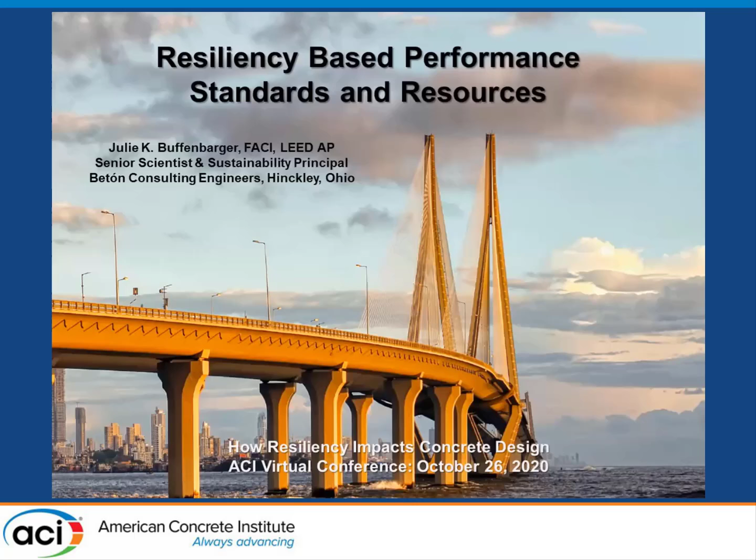Again, we're going to talk a little bit about resiliency-based performance standards and resources. And it amazes me that I started looking at resilience in 2008, and how it's taken almost 10 years for a lot of the government and many entities to catch up.

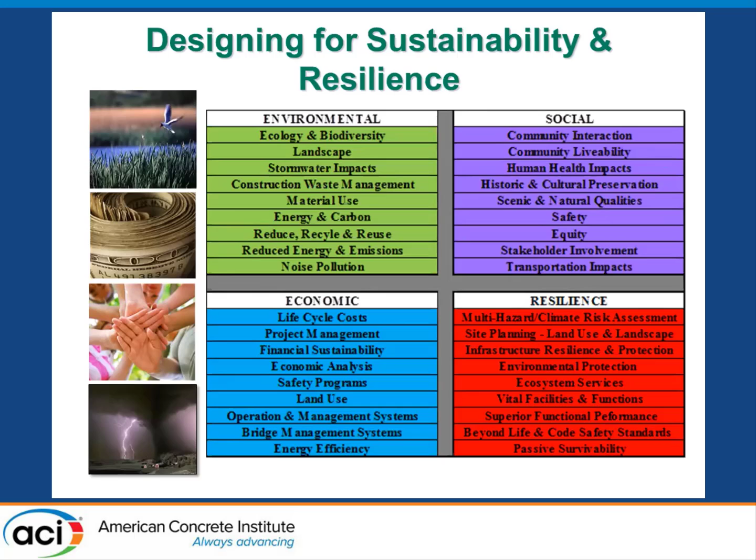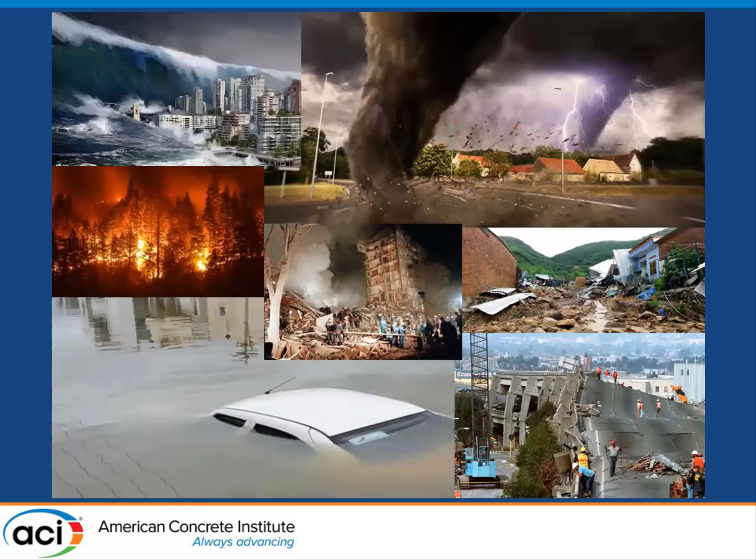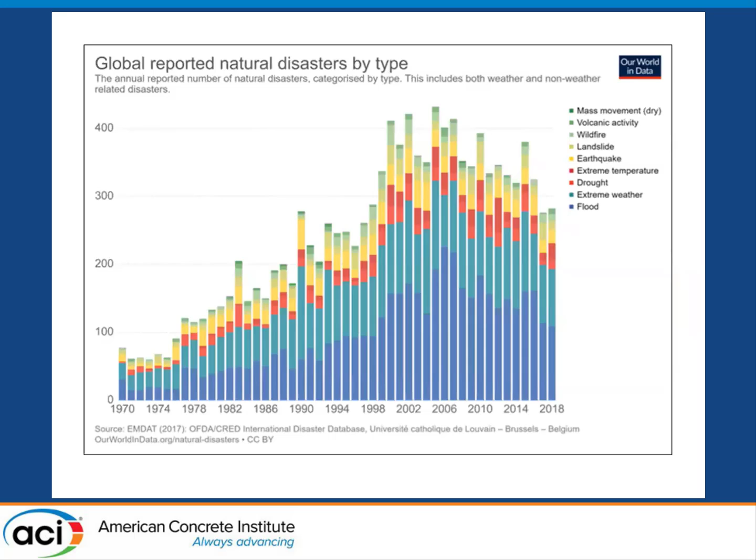When we design, we need to have consideration because, as Claude said, anytime we turn on the TV today, we are looking at what happens across the world with natural disasters. If we look at those disasters reported by type, this is Our World in Data that comes around, we can see that substantially there are earthquakes, but more so than anything, we see flooding, extreme weather events, and so forth across the world.

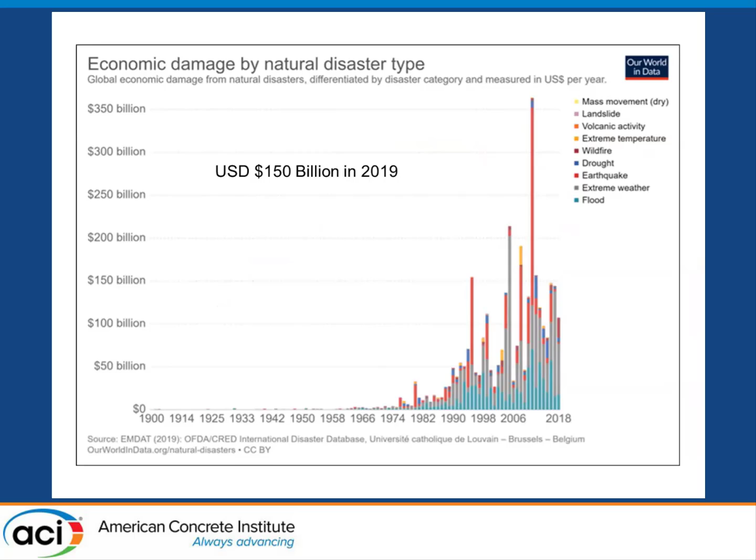And with these disasters are economic implications. In the United States alone, we had an unprecedented amount of economic losses last year due to natural disasters. Worldwide, it equates to about $150 billion in 2019. More so, there are immeasurable impacts that we can really not account for. There's no economic value that we can place on the loss of life or other items such as our loss of social capital, our loss of cultural identity. Certainly these are very important to us in our communities and as individuals.

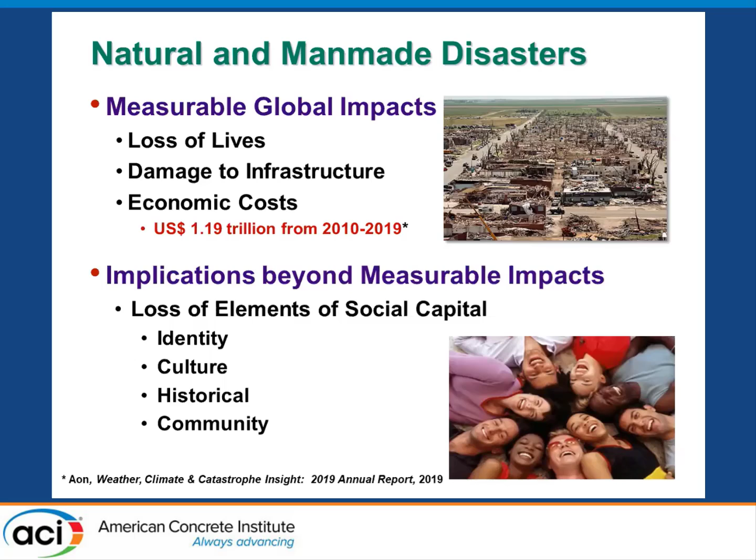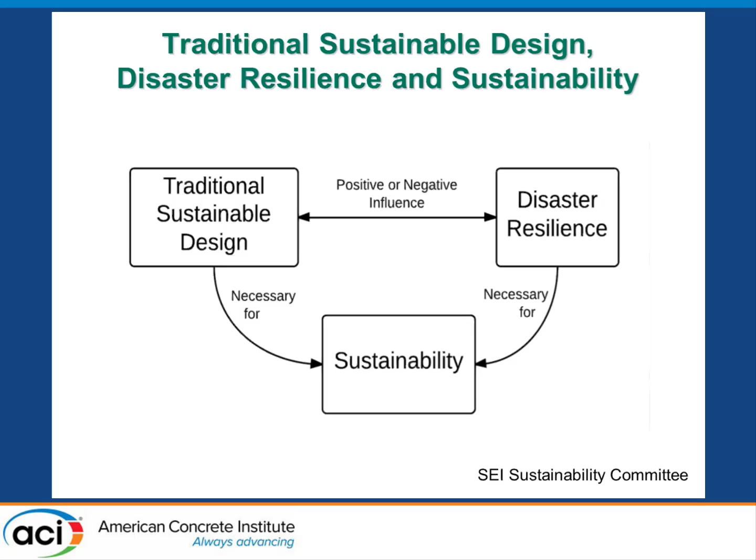Many people say the most sustainable building is the one that lasts or is still standing. Now, a lot of people don't really understand the difference between sustainability and resilience.

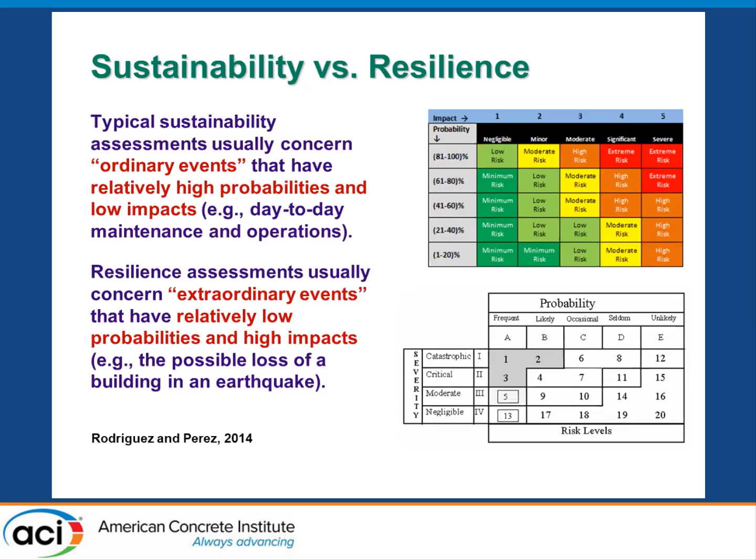I like to really boil it down very succinctly. Sustainability assessment usually concerns ordinary events that have very high probabilities and low impacts, such as your day-to-day operations and maintenance, whereas resilience really deals with assessing those extraordinary events that have relatively low probabilities and high impacts, such as possible loss of a building in an earthquake, major flooding, a tsunami. Those are the types of things that we really think of as extraordinary events.

The problem with resilience is it's really quite complicated. It's kind of like a lot of people say it's the new sustainability. It is, but it is not. I like to look at resilience from really a very high level in many regards, where I'm looking at it from a worldwide level, versus the lens, which is what you make it to be, such as my big eyeball there.

Everyone has a different lens. We may want to look at it at a country level, or at a state or provincial level. We can then drill down into a regional level, to a local level, and then come down to a structure level. It's very multidimensional as well, because we are looking across multiple disciplines, where we will be looking at the functionality of a structure, its failure mechanisms, the mode to recovery, its adaptation. But certainly then we must also consider the multiple stakeholders. We have investors of those buildings, and then who are the beneficiaries of having more resilient design?

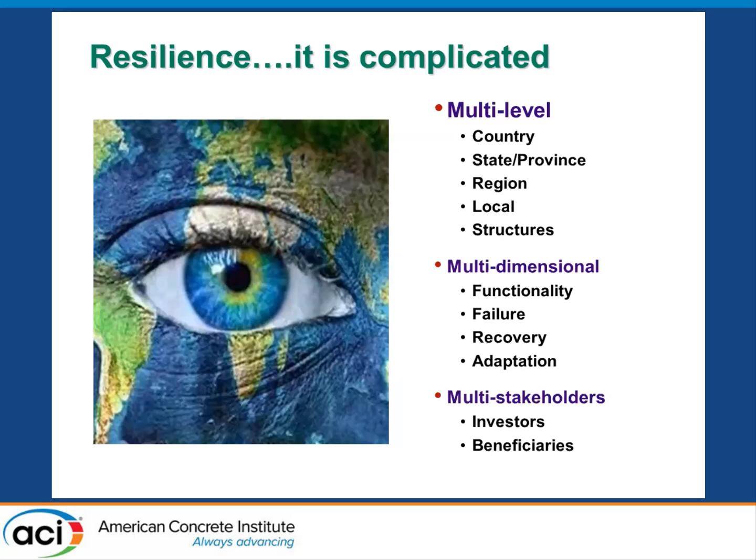Certainly we have a lot of people that look at resilient communities, and this is really where we see the United States and many other countries looking at how do we make more resilient communities. I kind of look at this as one level above our building structures, where we're looking at how do we return our citizens to work more quickly, how do we reopen our businesses, or really what we say today is how do we get our economy rolling again so that people can return to their quality of life.

I also like to look at resilience a little bit differently. Steve Szoke actually coined this term functional resilience, and I really do like it because a structure needs to maintain its integrity, and so its function, its ability to house people and to be inhabitable, needs to be restored.

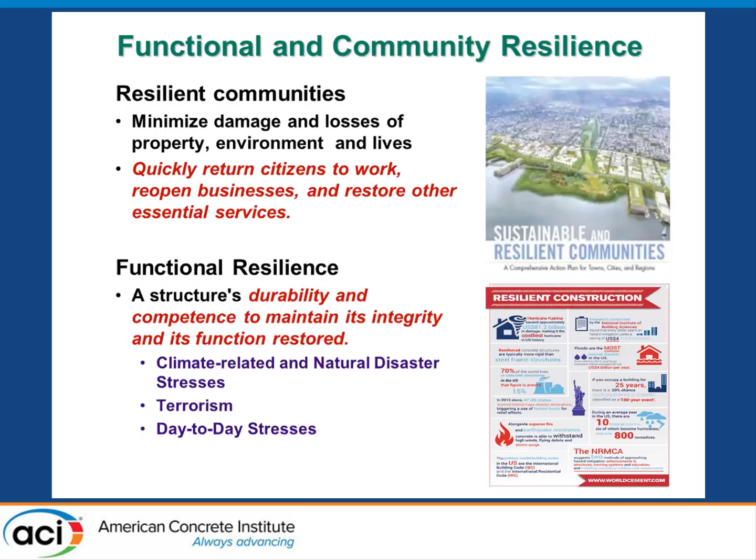Now, we think of disasters as climate-related disasters, but we also have other terrorism-type stresses. We also have day-to-day stresses, and all of these are very dependent on the resilience of the structure itself.

Now, why are community resilience and functional resilience linked? Well, obviously, we need to have structures that have the ability to protect and provide public safety, and we need to be able to recover quickly and efficiently.

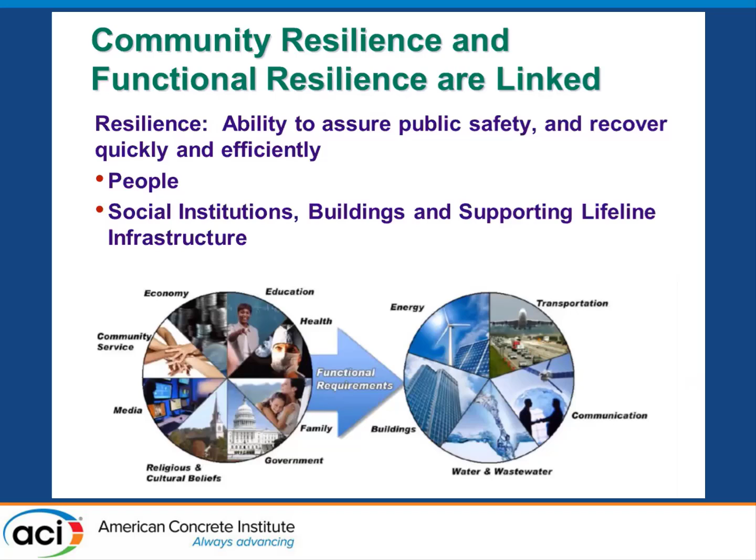So when we look at these, as we said, as the lens: if we have functional requirements for our energy, our transportation, our communication, and these are all segments, these impact our economy, as we've seen right now in the pandemic. They also impact our beliefs, our cultural government, everything is impacted. And so they really go together.

So one of the issues with resilience is that, looking at different levels, some of us may focus on the vulnerability aspects of resilience, which is what is our resistance to the event, where others may be focused more on the human capacity, which is to recover, or bounce back, or to adapt to the changing climate.

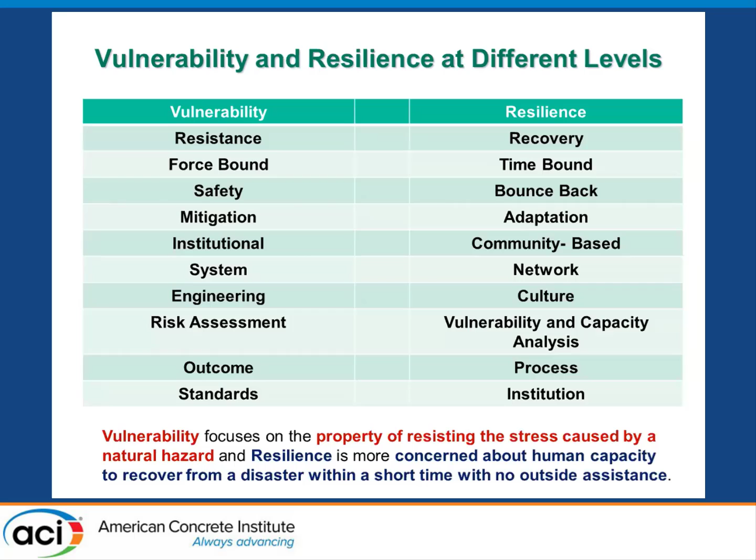So again, as I said, resilience can be quite complicated when we view it not only from a structural level, but when our structures are linked to society, we again have to take into consideration these other lenses.

And so when we look at planning and preparing and absorbing, we really go through risk management exercises. And I am not going to steal Jeremy's thunder because I'm sure he's going to go through this. But when we really look at risk, we're looking at the hazard versus our vulnerability and also the consequences that come with not being as prepared, or the consequences resulting from the hazard over time.

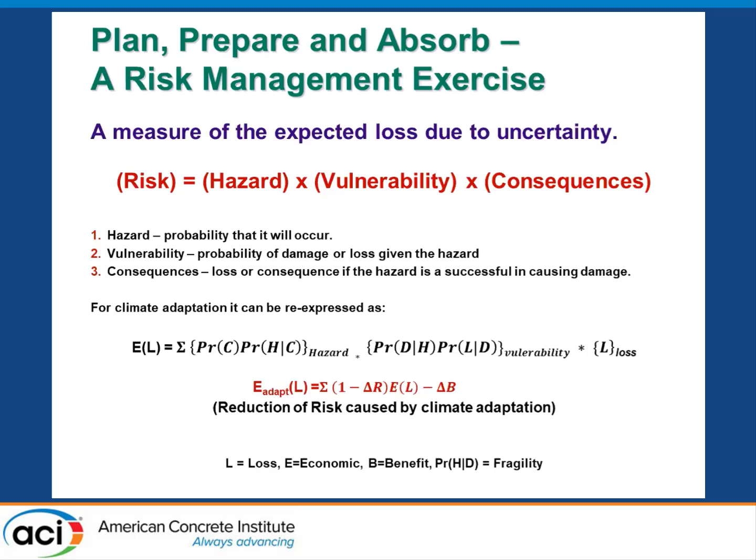And certainly what we try to do is reduce our risk caused by the climate. And certainly this is based on a lot of science, which I will let Jeremy tackle, but typically we look at things like fragility curves and economic benefits and losses.

And really when we look at risk assessment, it's a trade-off. You know, if we have a climate hazard, how are we reducing our vulnerability, or enhancing our resilience, or reducing our exposure, to receive some reduced impact and benefit?

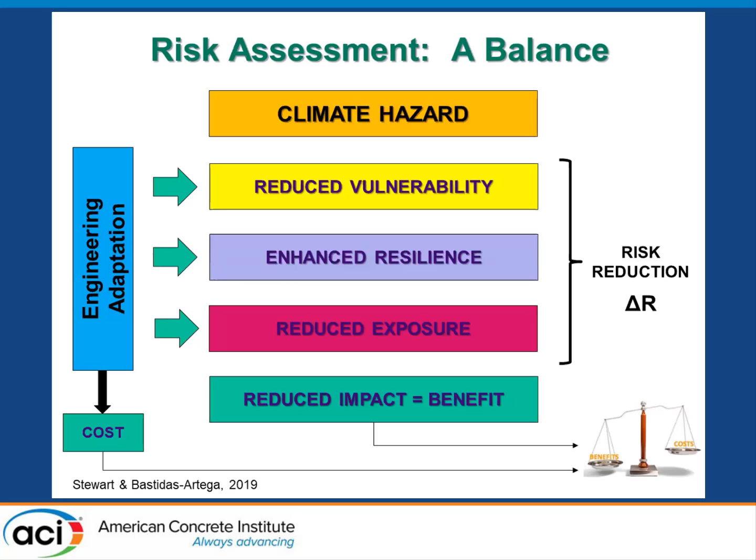And I'll show you this book at the end, but I love this book that was out late last year. And it really succinctly talks about how we balance these things across many different sectors.

But when we talk about risk-based planning and tie it back to buildings, it really is tied back into the codes. Codes are really the principal mechanisms that regulate the design and construction of structures. Most often they are life safety and collapse prevention based.

There is no regulation today as it stands across the US building codes that ensures buildings will be usable after a disaster. Now, with that being said, 318 has started a subcommittee, Subcommittee N, on sustainability, which is also tackling this idea of how do we make our buildings more sustainable and how do we make them more resilient?

It's going to be in code language, but again, we're taking baby steps in the code. Unfortunately, in my opinion, we're lagging where we need to be to provide safety to everyone that is involved in these types of disasters.

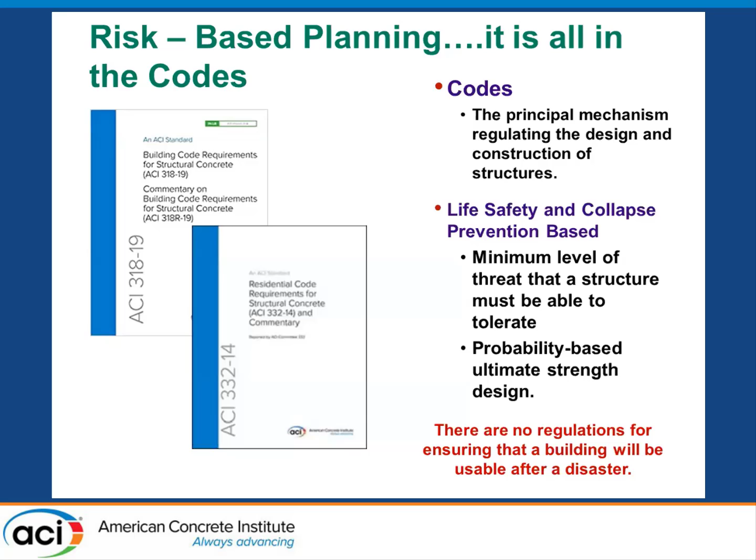And certainly we're seeing changes in codes throughout the world, but they are slow to adoption. And the other complication is the measurement: how do we measure what is resilient and what is not resilient? So, as I said, it's a very complicated issue.

Now, when we talk about resilience, there are many different definitions. When I look at a structure, it's really the structure's ability to withstand some impacts of an event. So we might have a minimum level of functionality after an event, or we may be fully functional after an event. More often, people look at this as the time required to return to normal functioning following an event, a disaster event, a storm event.

People don't like the word event. You might call it an adverse loading, say snow, wind, rain. And really what we have to do is, how do we assess that building after it's gone through this event?

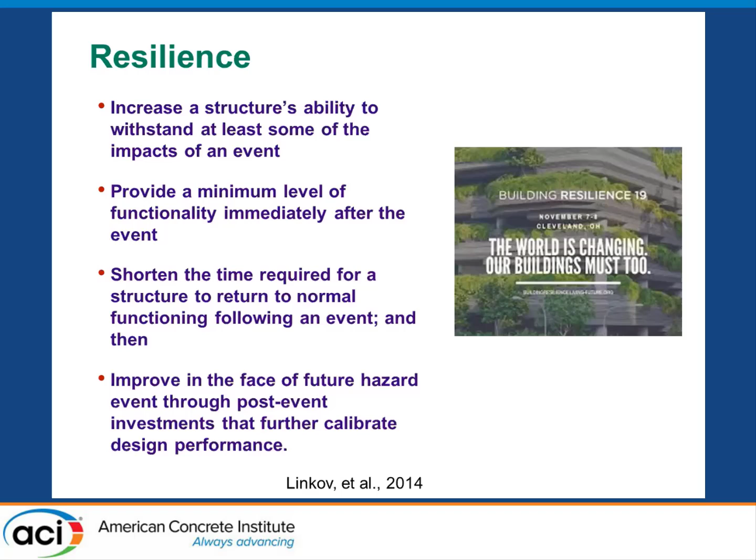And so last year, there was a very interesting group called Building Resilience 19 that was in Cleveland, Ohio, with a lot of interesting speakers talking about these types of issues. And there's not agreement across everywhere.

What I like to look at, when we talk about a building, is this diagram from the National Academy of Sciences, where you have some sort of failure mechanism, whether it's the brittleness of the building, how ductile it is, the graceful failure, and then what kind of recovery event are we looking for?

I'm going to show another graphic that makes a little more sense. When we're talking about this performance criteria, the current focus on resilience is really our plan and preparedness. We're still working on how buildings and how the community absorb this event, and then obviously we have this recovery period. How well we recover will really help us as far as economics and the return to a normalcy that could be better, worse, or equivalent to what we were seeing before.

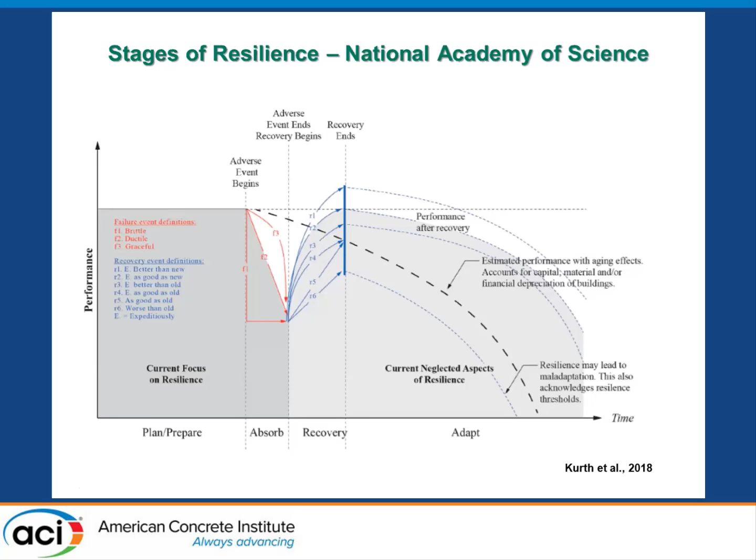We can see the key here, but worse than old, and this slope is going to tell us how fast we're recovering. There is an adaptation portion, and we've often seen that many countries that have gone through these types of events have not really returned to their normal economic boom. If we look at the tsunamis that hit Japan, that region has not yet recovered, nor will they probably recover from that event. Their automotive industry is gone, those jobs have been lost, and those people are still rebuilding their lives, such as we see in Katrina in the US.

Now I'm going to go through a brief review of some of the industry standards and resources that are available to us.

This is a slide I really like, from a workshop I attended in Washington, DC, done by FEMA and also the National Institute of Building Sciences. If we take that same graph but make it a lot less complicated, how robust we are in our buildings, or our capacity, will really determine how prepared we're going to be and how fast our return to operation will be.

So if we have an asset that has very low resilience, we're going to follow this red line where we're really not going to recover. We're still going to have issues returning to normalcy. We're just not going to get there because we can't anticipate, say, the additional snow load on a building or the additional flooding that's happening in your area.

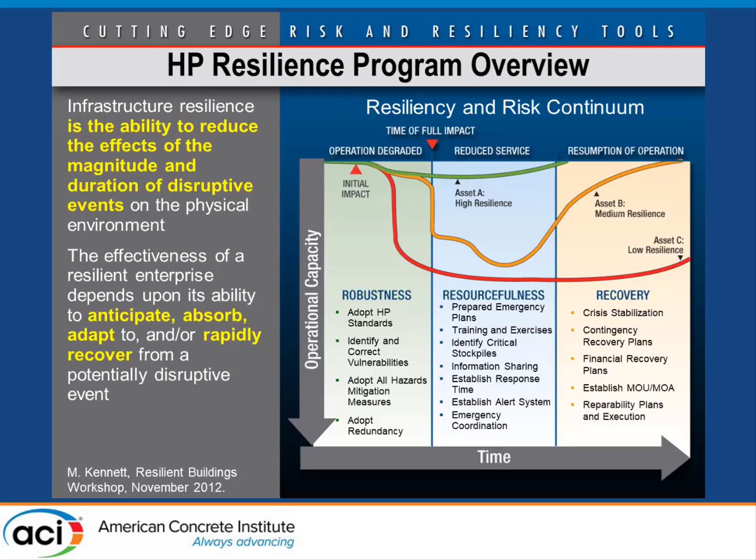We might have a medium asset building, which may resume operation, but it's going to take substantial time to get back to that normalcy, and again we might have to have some contingency recovery plans. Ideally, we would like to have the ability to return very, very quickly with very little reduction in service. That is really a truly resilient structure, a resilient community, and really a resilient country in many regards.

So why is this investment in resilience so important to us? Many of us might look at this as exceeding the minimum design requirements, because when we look at resilience under a similar lens to sustainability, we realize there are some societal benefits. Many people that go through these disasters suffer PTSD, there are injuries, long-term job losses, deaths, and certainly there are environmental benefits by enhancing construction materials.

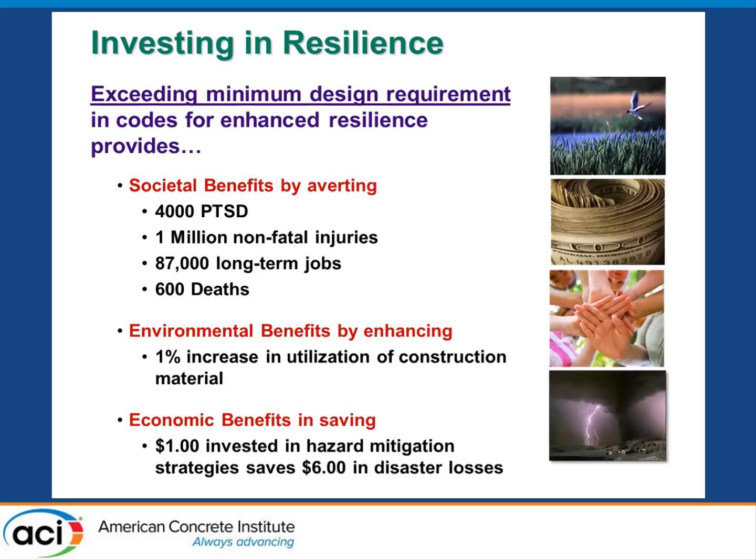FEMA did a study: what used to be for every $1 invested in hazard mitigation strategies, you would save $4. They reevaluated that about 2 years ago and now have found that for every dollar we invest up front—in resilient construction, in fortification of our existing structures—we can save $6 in disaster losses. So there is a very large economic implication in having stronger building codes.

Many of us have seen that there's been very little legislation over the course of the last, I would say, 20 years. I'm just going to go over a little bit of the legislation that has been spearheaded by the concrete industry. This was spearheaded by NRMCA, in 2013.

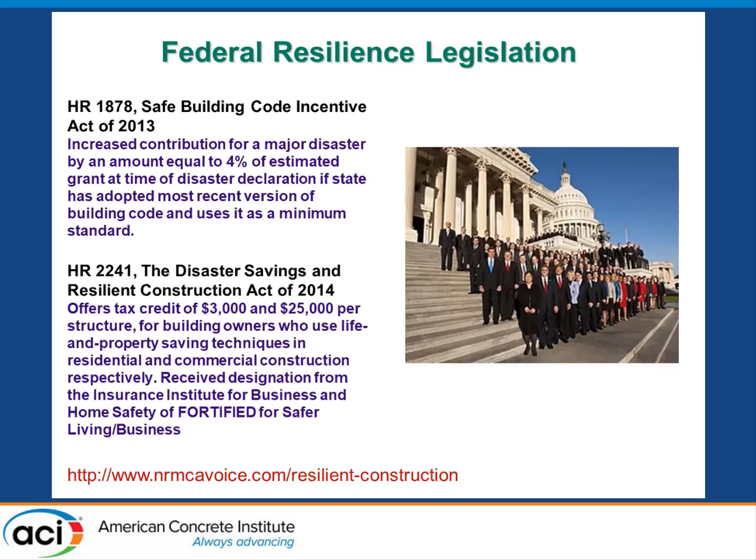Those things spearheaded were the Safe Building Code Incentive Act of 2013 and the Disaster Savings and Resilient Construction Act of 2014. These offered tax credits to those people that would use life and property saving techniques in construction, using some ideas coming from the Institute for Business and Home Safety, using their Fortified for Safer Living and Business. We'll go through some of these systems in the future.

There was also some amendment for the Water Resources Reform and Development Act, again to help resist hazards due to a major disaster. This was done by the Army Corps of Engineers, along with the National Academy of Sciences, to consider the reduction in long-term costs and vulnerability of our infrastructure. As many of you know, much of our infrastructure is quite dated, in need of rehabilitation and fortification.

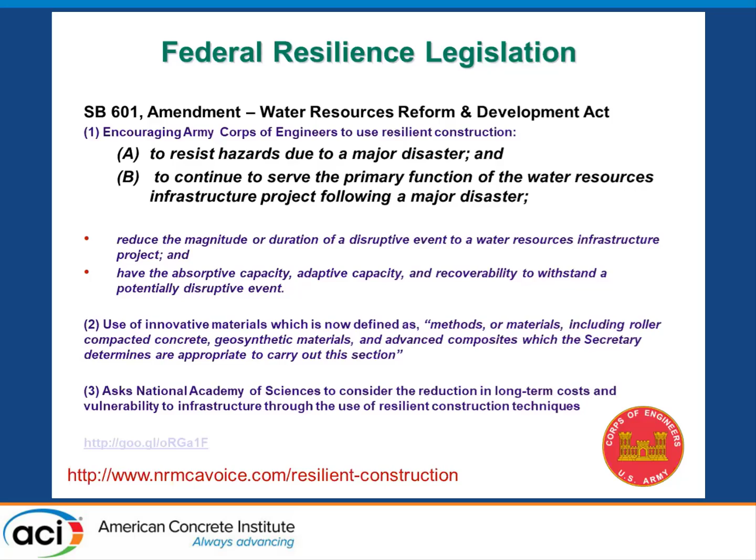When I start looking through the literature—and this was a good exercise for me, because while I keep up with it, it's been a while since I reviewed where we've been and where we're going—really in 2017 we started to see an impetus for design professionals to consider resilience and climate-related risks. This was done by the U.S. General Services Administration in their Publication 100, which asked professionals to exercise judgment regarding resilience and climate-related risks as an evolving professional standard of care.

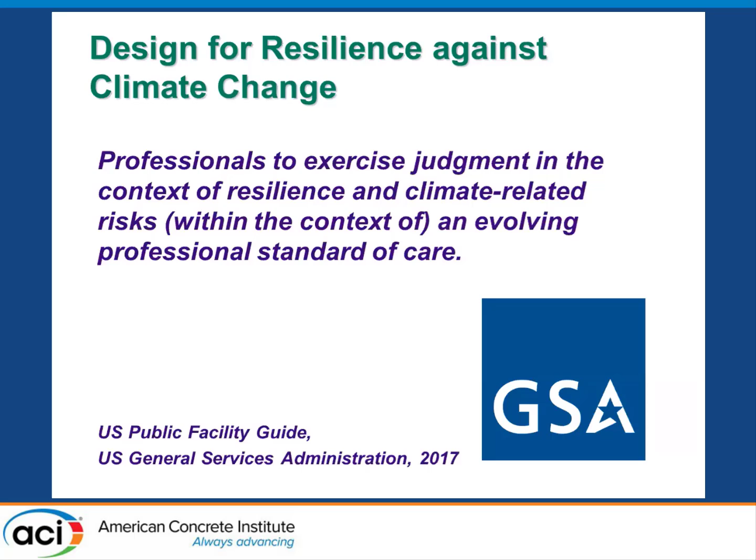So when we start using more of this code-type language where we say 'the professional standard of care,' now we're asking them to consider including resilience.

Some of the major influences I've seen in the last 10 years have certainly been the onset of disasters and how the insurance industry has responded. As I said previously, we're seeing multiple stakeholders that will influence the building code and our ability to move forward with design policy.

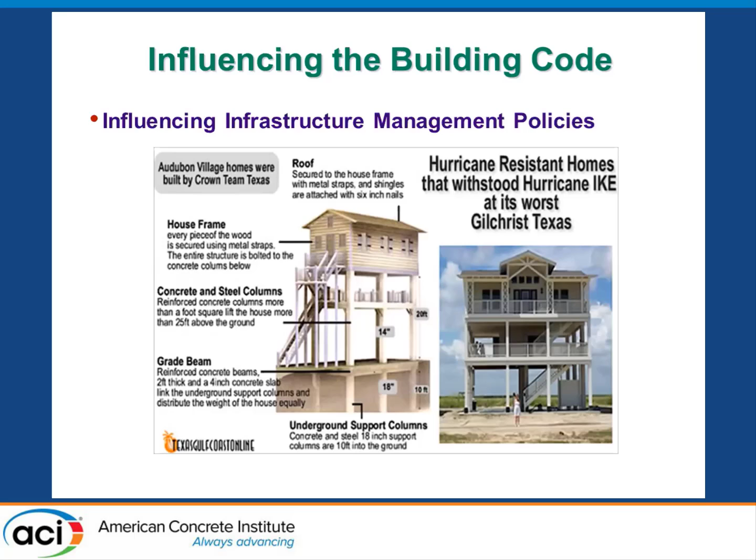When we saw hurricanes and the rebuilding of structures on the coastline, we first saw them allowed to be built back the same. But they go through another disaster and another insurance claim. Now we're seeing them actually required to build at a higher height, out of concrete, and secured with metal straps. These are changes influencing the building code for a safer environment for people.

Recently I also looked at the resilient adaptation work from the Center for Sustainable Building Research at the University of Minnesota. I really like their resilient goals, looking at what happens when we have no power—can we maintain someone in their home at that time with a habitable temperature?

Case in point, we've designed buildings over the last several years without operable windows. When we go through a heat wave with no air conditioning, that building may no longer be habitable because it's simply too warm to stay in.

Then we look at closed water systems and shelter. These are all terms we call passive survivability, where you're able to shelter in place. Our building codes allow us to stay in the structure and maybe evacuate safely, but they're not built for us to stay in the structure in a way that we could survive for a week or ten days. Unless it's built that way, you're probably going to have to evacuate the building.

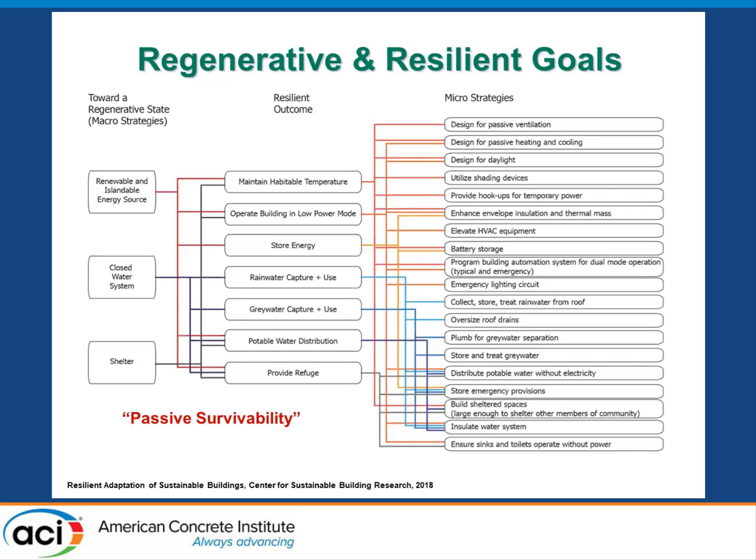A lot of this, as we see, LEED has always played a very large part in some of the codes and how they've changed. They started looking at green building and climate resilience in 2011, and since then it's really been more about disaster recovery.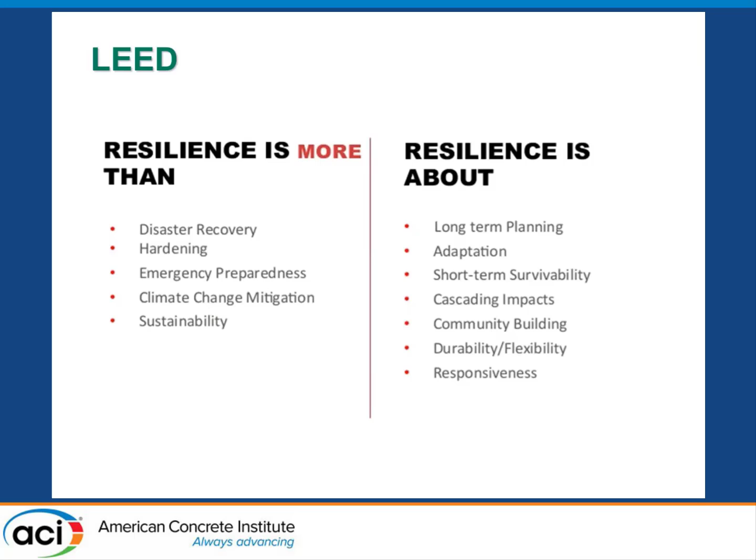Now they've moved more toward long-term planning of a structure—am I looking at short-term survivability, durability, flexibility, and responsiveness? So I do like seeing that LEED has grown and is looking more toward the future in planning.

They've actually included some pilot credits most recently—pilot credit 98, 99, and 100. We can see there was assessment for planning for resilience, design for enhanced resilience, and passive survivability. They would ask you to assess the hazards, which was a prerequisite to receive the credit.

Many of us may or may not be familiar with the LEED rating system, but it has often driven a lot of code requirements and carbon credits, and many of the governmental regulations out there today on the West Coast.

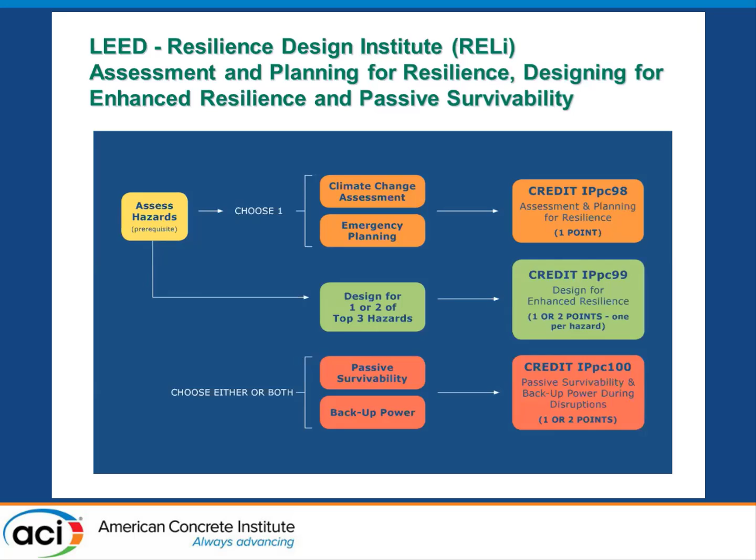Some of the other things I've seen in the literature, coming over time, is that FEMA, the Federal Emergency Management Agency, has looked at how we provide for community resilience. Many of those ideas have been based around community planning, and they've offered guides as to how we appropriately look at hazards.

When we look at resilience, we look locally. You cannot plan for snow in California the way you plan for snow and heavy loads in Minnesota. So we're going to have different weather events in our regional areas.

A lot of the modeling that goes into the codes, we really can't fully account for because we're looking at historical data versus what is happening today.

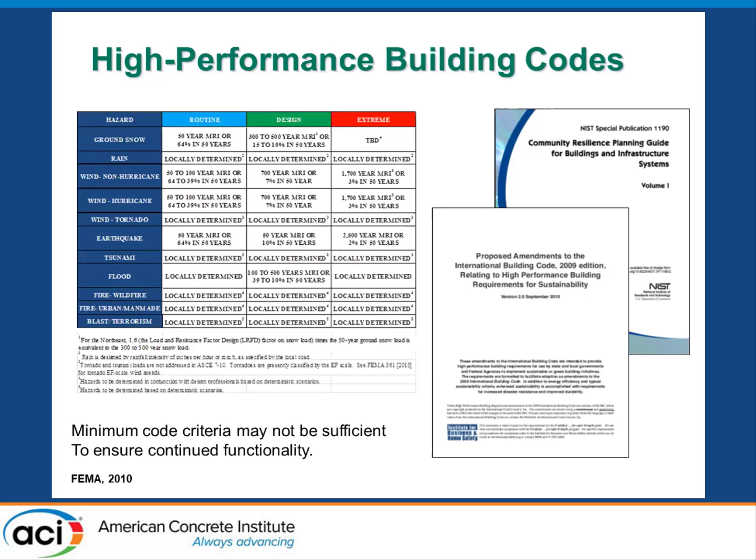One of the other areas I like to look at is the proposed amendments for high performance buildings. I won't take this away from Steve Szoke, who worked very hard on amendments that would take the International Building Code to a higher performance level. Again, we've never been able to design for what we're typically seeing today in extreme events, only historical design loadings.

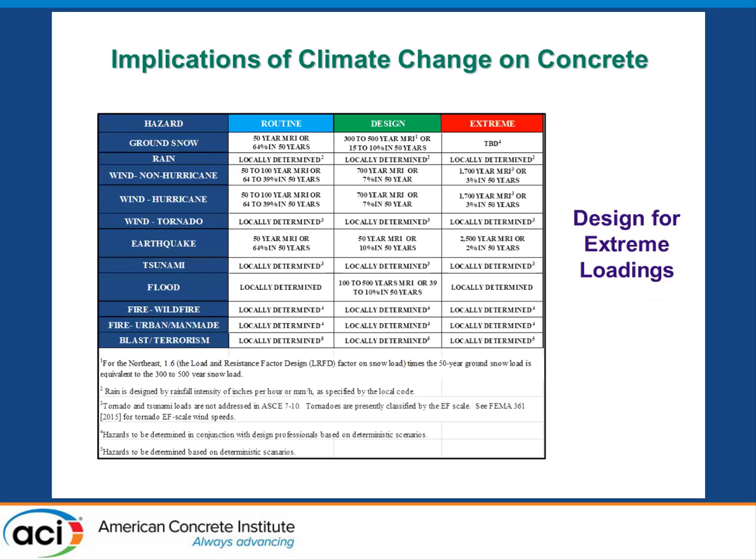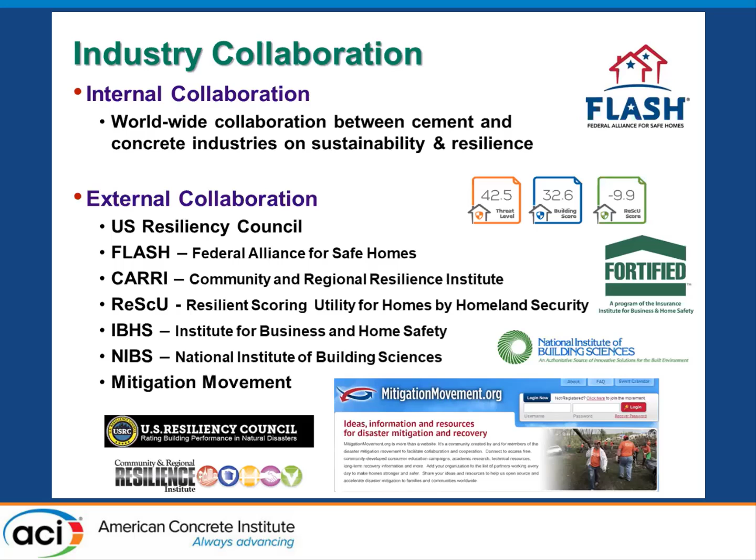When we look at industry collaboration, we've seen a lot of collaboration in the cement and concrete industries worldwide from both a sustainability and resilience lens. Some external collaboration has been with agencies such as the U.S. Resiliency Council, Federal Alliance for Safe Homes, the Community and Regional Resilience Institute, the Institute for Business and Home Safety, National Institute of Building Sciences, and the Mitigation Movement.

I'll go through a couple of these. One is the Insurance Institute for Business and Home Safety. They have standards for safer living, both on a commercial level for safer businesses and for safer living residentially. You can see some of their table of contents. What I like about this standard is that it uses very simple tasks to increase resilience to a hazard, like adding straps into roofing assemblies, which are low cost and economical.

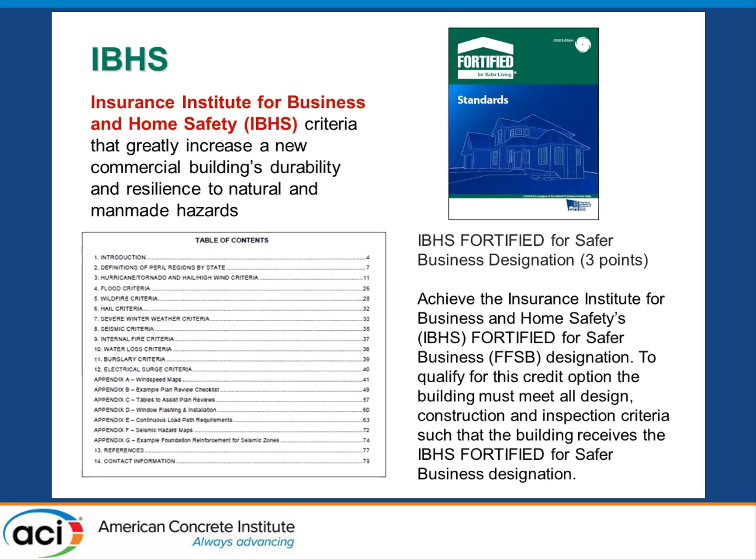There are other existing models for enhanced resilience, including the U.S. Resiliency Council and NIBS. The U.S. Resiliency Council is looking primarily at earthquakes and at a performance rating system. They adopted some ASCE-based methodology and look at the performance of a building under consideration, looking at a design basis event through the ASCE 7 provisions.

What they're really looking at is the repair cost reported as a function of building replacement cost when subject to ground shaking with a 10% probability of being exceeded in 50 years. So they're given some measurement of 10% within a certain life cycle. We'd like life cycles to be much longer, but hazards can shorten that period in which a building is functional.

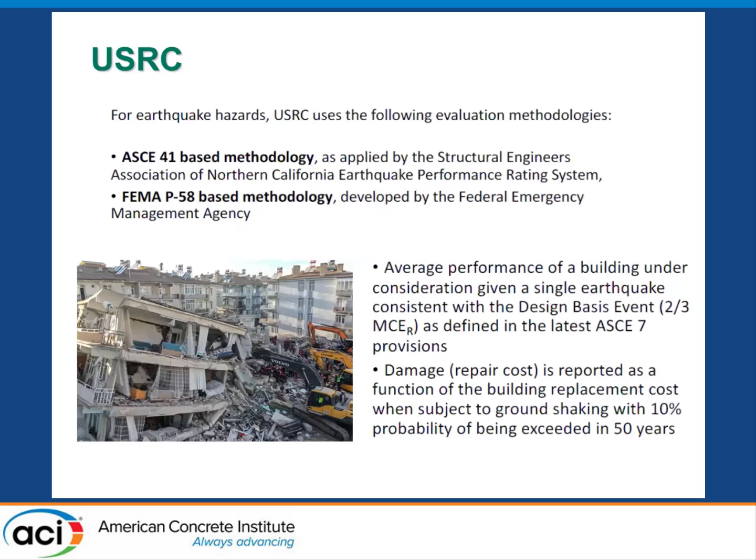Ideally, if we look at structures, we may have to add redundancy, which adds to the cost, but we have to weigh that against how we're going to resist hazards in many ways.

NIBS has a resilience-based design provision, looking at a resilience goal by providing design criteria based on functional recovery time. I'd be remiss if I didn't thank Emily Lorenz for sharing some of these slides with me. I saw them presented succinctly yesterday, and she kindly let me borrow some of them today.

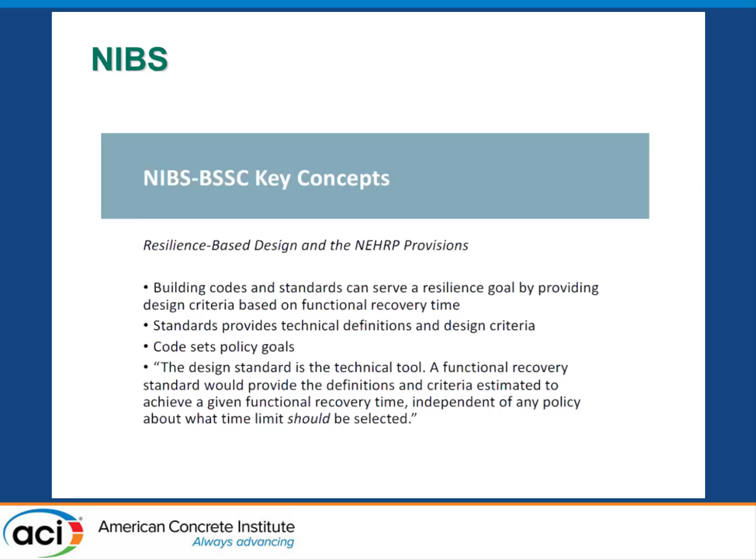Their design standard is a technical tool looking at the functional recovery standard, what time limit should be selected, and what strategies and provisions should be set in specific criteria. The concept, in many regards, is a supplemental or perhaps primary basis for earthquake design of buildings.

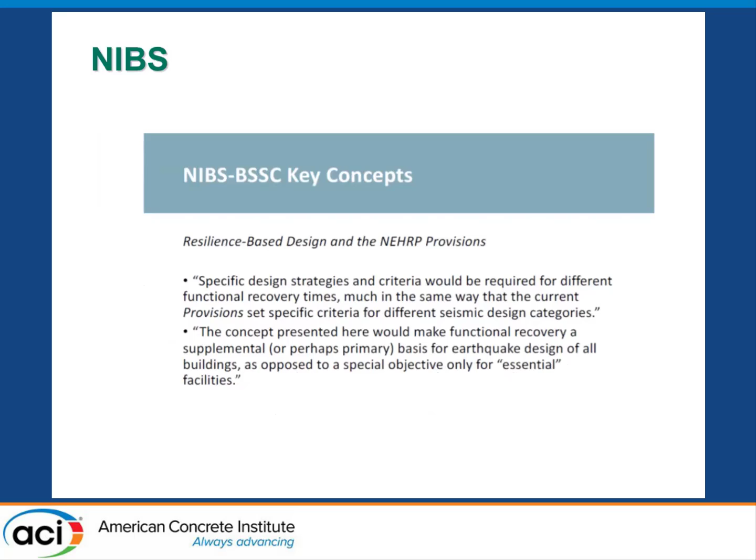But we have to look across the spectrum of natural disasters and what would take place. Other things to consider: how recovery time is defined—hours to months? The rate at which we recover will really dictate our level of success in returning to normalcy, so how we design is important to how fast we can recover from a disaster.

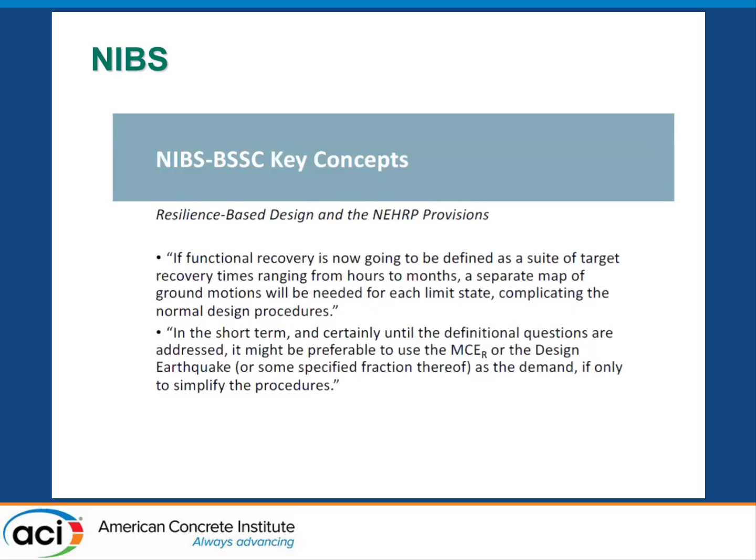We could build buildings today and say we don't really need them to have a high level of resilience; we can deal with a low level of resilience. I like this because it looks at buildings as having their own identity—how long do we want a church to survive?

How long do we need a hospital to survive? How resilient does each building need to be? I also have to say, what kind of structures are there? If we have a wastewater treatment plant or a bridge that allows egress during a storm event, that needs an exceptional or very high level of resiliency. So part of the difficulty in our lens in viewing resilience is how do we look at the metrics, and how is it viewed?

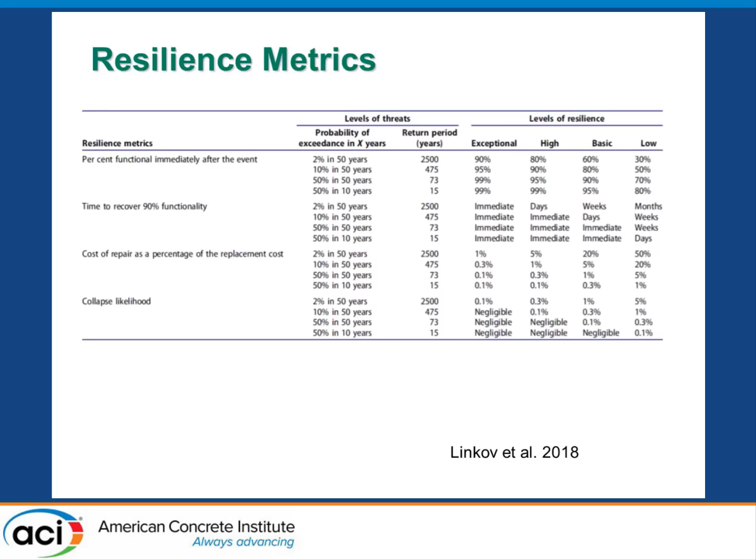There's also the problem that we haven't always taken the land use into consideration. In some cases, very sustainable buildings were built along seasides, but they were struck down during very large storm events. Case in point: if you remove some of your environmental barriers to hazards such as sea level rise or surge, we can build as sustainable or as resilient as we want, but we may still not have a building standing in the end.

The other part of this, as I said, we have to look through different lenses. There's the economic part—there's really a lack of economic incentives today for the code to go in this direction. Many of us would like to get our insurance agencies involved, and they're willing to look at it, but not fully. So again, there are obstacles.

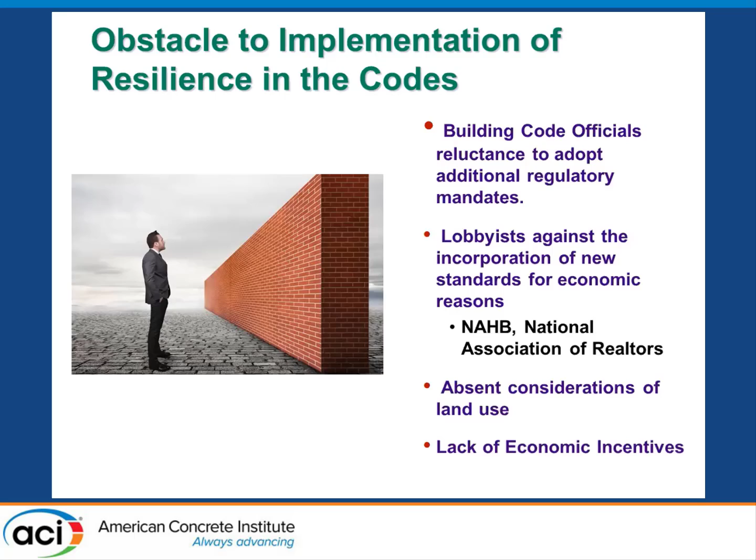In closing, I hope I've given you a broad overview of what is going on in our industry. I like to look at it through my life cycle lens: what we build and how we build will all have some environmental factor. And as I say, resilience will have these social indicators. If we use the right tools and the right design, we can have very long-lived structures, and these all have implications on social indicators.

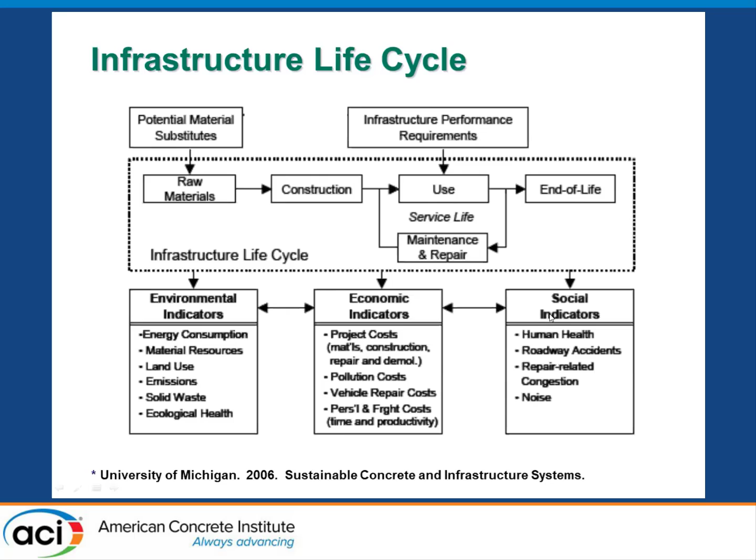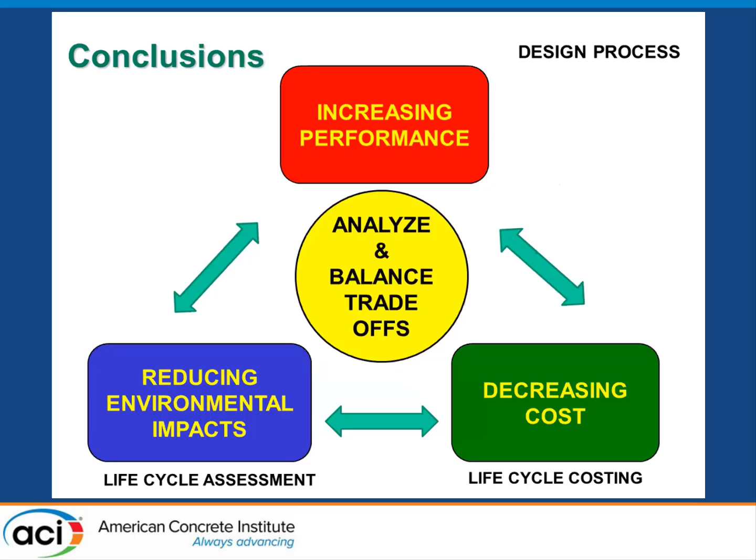Going forward, we have to know that if we increase performance, there are trade-offs, and we have to analyze and balance those trade-offs. It could be economically, environmentally, or in a performance manner. So when we look at what we're doing today in our design, it's imperative to look at the durability, robustness, and adaptability of our original designs.

How can we intertwine sustainability and resilience in our design? I like the idea of functional resilience in structural design, because if we have a building that stands—such as our hospital, our governmental functions, our water treatment plants—they are going to help support the resilience of the community.

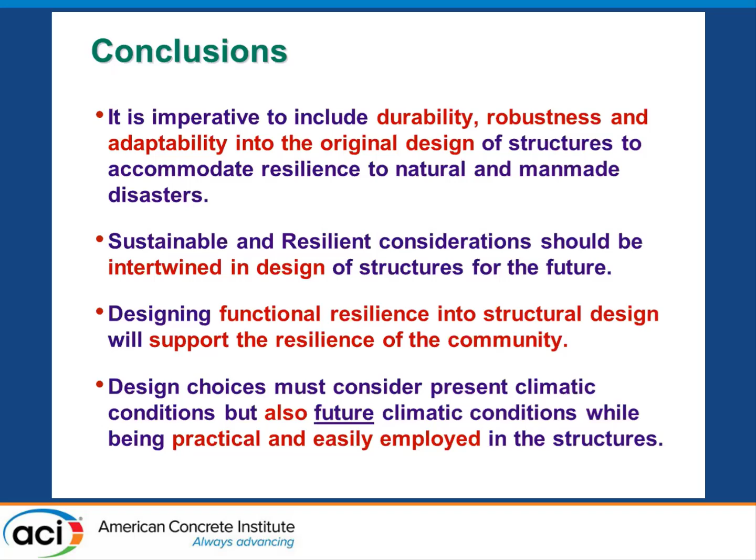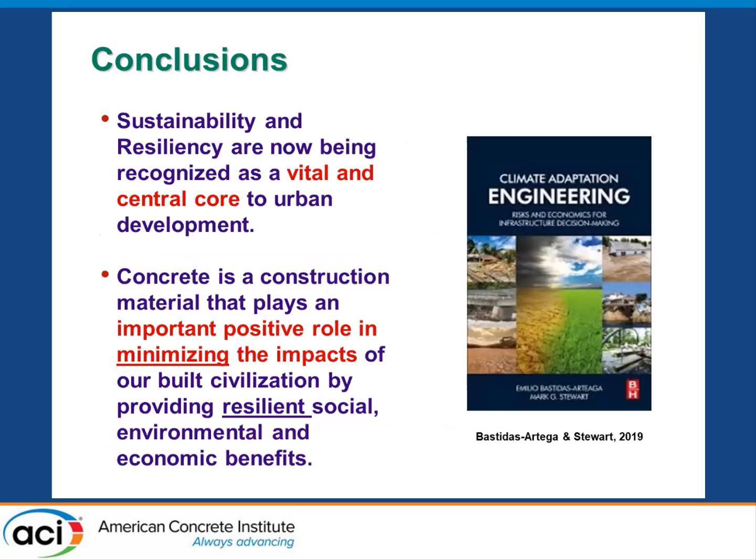But we must make design considerations not just based on historical events. We need to look at future climatic conditions and see how we can practically employ these ideas in our design. There is a very good book out there I recently read on climate adaptation engineering, looking at infrastructure. I invite all of you to take a look at it—it also shows how concrete has a very positive role in the construction industry, helping minimize the impacts of related storm events, and it is very sustainable. With that, I thank you for your attention, and if there are any questions, I'll be happy to answer them.